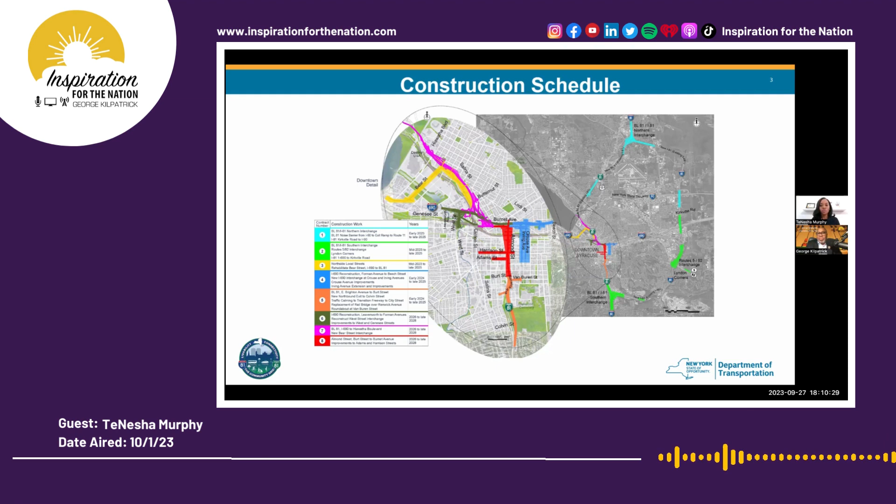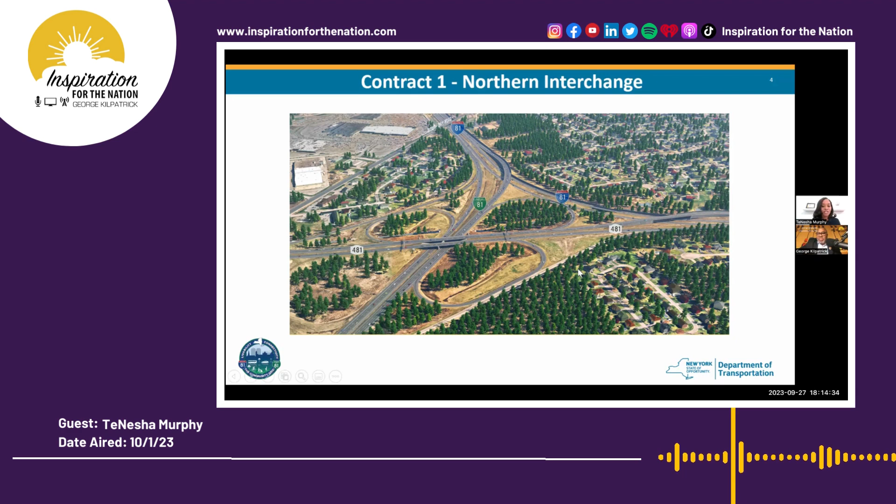All right, so this is contract one. The next section is just some information about contract one. It was awarded in January - it's a $300 million contract. In the spring and summer we did preparatory work: took down some trees, took down noise barriers, widened lanes, started building large culverts. This fall and winter we're going to start the foundations for the new noise walls we're putting up, and start working on the interchange bridges and culvert construction. So that's what's happening with contract one.

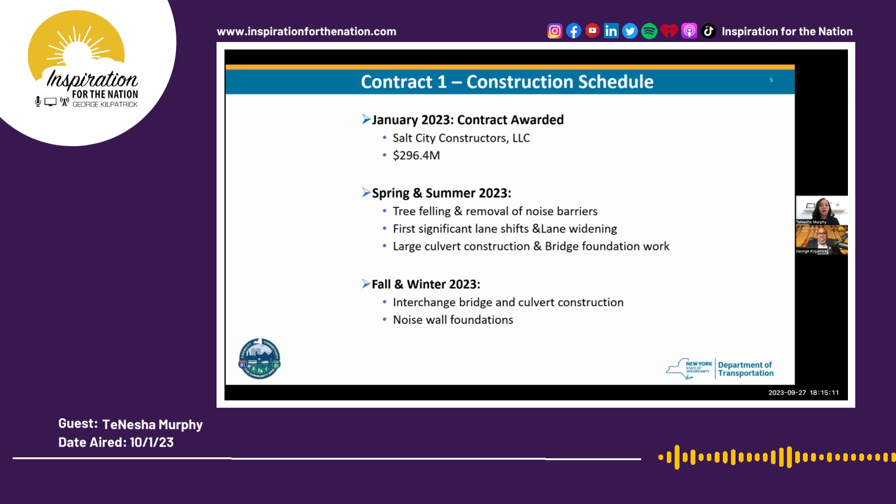Contract one should be completed by the end of 2025. Next up is contract two, which is the southern interchange.

That's where I live, that's where I'm affected. Okay, now we're getting to you. This is where you were coming from. Okay, that's where I was coming from. Exactly, coming down.

So this is our design that we designed for Contract 2. Now, the big thing with contracts 1 and 2 is they are called design build contracts. So what that means is the DOT designs it up to a point, and then we turn it over to the contractor that wins the bid, and say, this is what we want it to look like, this is what we think it should look like, and you design the rest. So those are called design build contracts, for contracts 1 and 2.

When we get to contract 3, I'll explain what that is. So these contracts we build up to a point, and then we let the contractor build the rest. So this was our proposed design for the contractor when we gave it to them.

As you can see, where my mouse is right here is the new 81 coming south, and this is the new 81 going north. You have Brighton Towers over here, you're familiar. So this looks really good, you see everything.

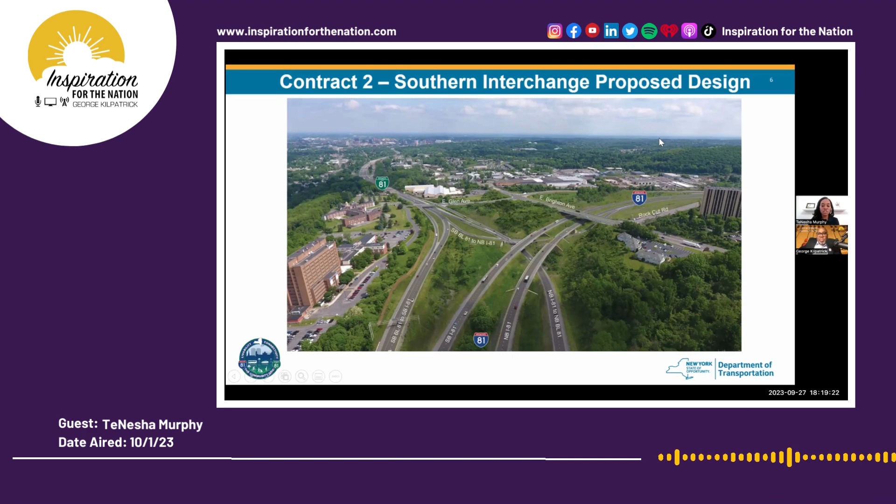So this contract is already started. It just recently started this summer. It was awarded to our contractor CNY Alliance, which is a conglomerate of four different contractors.

It's nearly $385 million. This summer, they did some geotechnical work and started working on the traffic pattern changes. There's also work in this contract in the town of DeWitt and in the town of East Syracuse, and I'll get to that in some future slides.

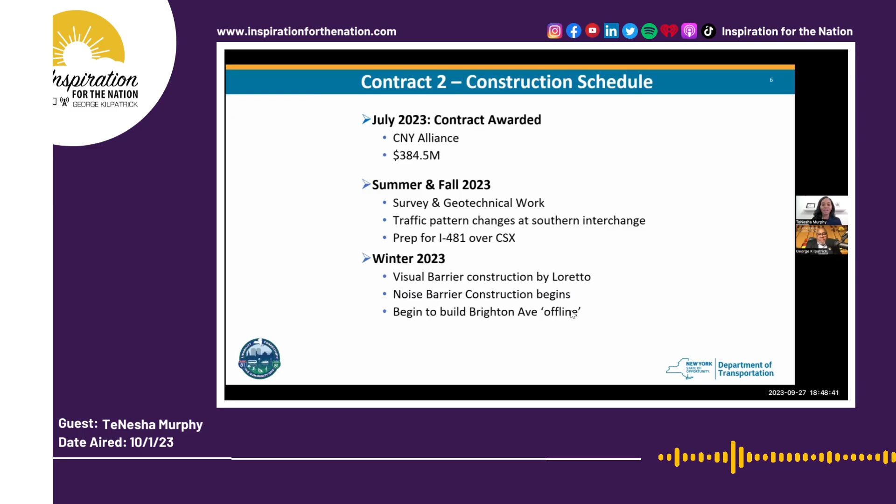This winter, they're going to be putting up a visual barrier for Loretto. They're going to start the noise barrier construction, since a few noise barriers will go up on this contract, and they're going to begin building Brighton Ave, since there's a new bridge being built for Brighton Ave. So George, what is going on now with contract 2?

The biggest impact are the ramp closures. We have two ramp closures happening right now. If you're traveling I-481 southbound to 81 southbound, that ramp is closed, and they detour you — it's a short detour through the city where you take I-81 north to exit 17, the South Salina Street/Brighton Avenue exit, and jump right back on I-81 southbound.

We also have another ramp closure if you're coming from I-81 south going to I-481 north. That detour has you getting off at State Street, hopping on East Brighton Ave, and then hopping on Rock Cut Road to get back onto I-481 north. Those two ramps are going to be closed for basically the duration of the contract, which ends in spring/summer of 2025 — they will not be opening back up.

That's a minute. Yeah, that's a minute. As you can see for the YouTubers here, those two ramps are dead smack in the middle of the interchange, so the contractor had to shut them down to be able to work on switching out the interchange.

If you travel that every day like I do, you can see that they're mowing down the hill — big grass, the berm. They have to take the berm down. Yes, very berm, good, thank you. I called it the big hill grass, but you can see it's like first it was a lot of grass, and now every day we go through there, it's getting lower and lower.

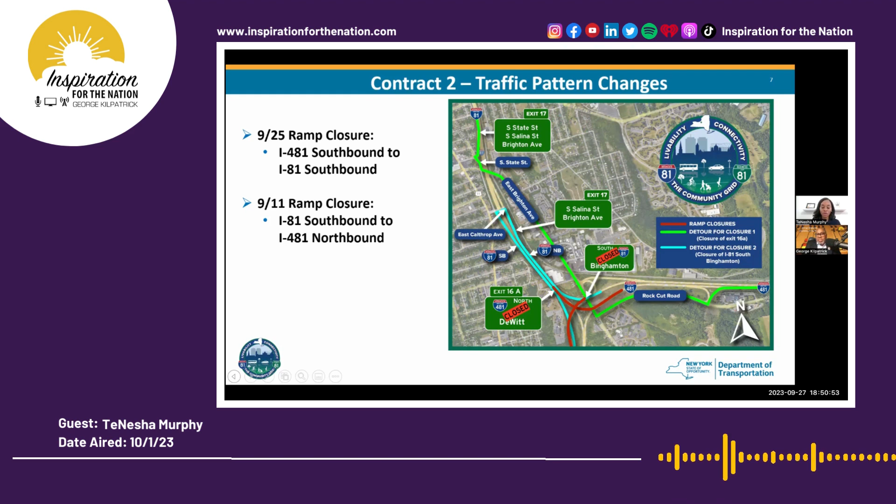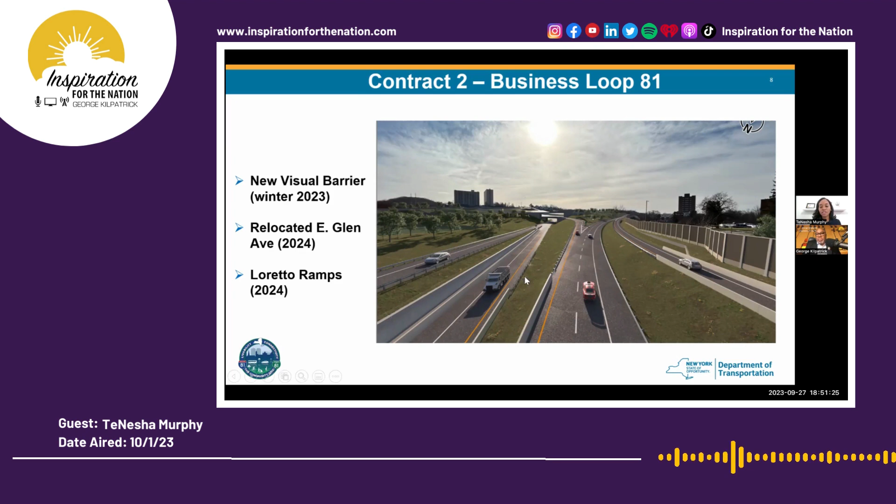Moving on a bit — there's going to be a visual barrier in the future for Loretto that will protect that business from the new business loop there. If you're watching on YouTube, you can see the visual barrier off to the right-hand side of the screen. In this area there are new ramps that will lead you to East Glen, and this is a rendering of the business loop there. Then over in DeWitt, exit 3 by the DeWitt Wegmans, there's going to be some work done under contract two.

Basically what's going to happen is they're going to change this off ramp, which currently only lets you make a left onto East Genesee Street to get up to Erie Boulevard, the former Shoppingtown Mall area. They're going to make that ramp so you can go left or right, putting a light right here so traffic can be stopped to allow it.

This traffic light is going to help people coming from the north. If you're headed north on 481, which will eventually be 81, and you want to get off to go to DeWitt, you're kind of waiting, playing like double dutch trying to figure out when you can get in. So this light will cause a little pause in traffic so that people on this exit can turn safely onto 5 and 92 here.

If you want more information about that, there's lots of renderings on our website you can go and find. But that's a huge change for this area.

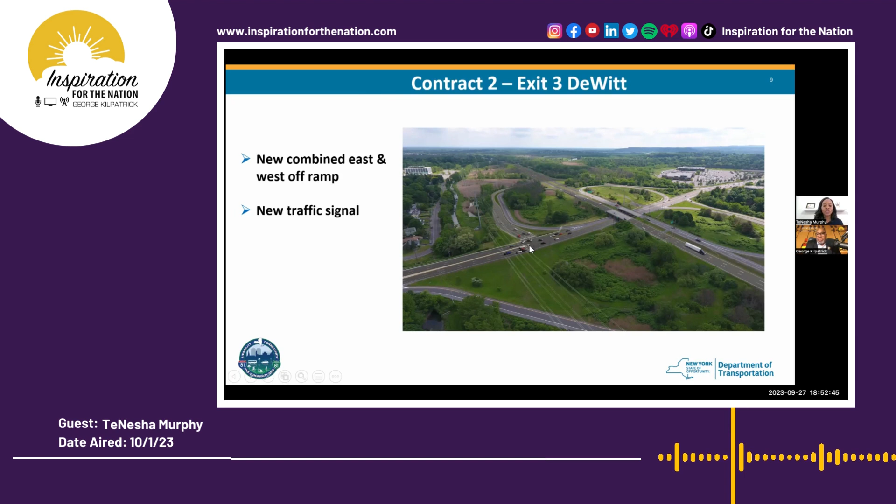This contract has not been awarded, we have not started on it yet. It is going to be awarded probably by the end of this year, and then the contractor will start working in this area in the spring of 2024, so spring of next year.

So, TeNesha, if the lawsuits—so there's a lot of 'if.' Say there was no lawsuit. Yes, let's start with that idea. When would the whole thing be done?

The whole thing will be done by the end of 2028. So 5 years from now, all things considered—court battles and all. Right, if there were no lawsuits, yes, the plan was to be finished by the end of 2028.

Which means—this is what I think some people don't realize—right now we should have really been almost all 5 contracts going at once. But we're only, by the spring of next year, going to have 3 areas within the county that are under construction: the Inner Harbor area, the Southern Interchange, and the Northern Interchange.

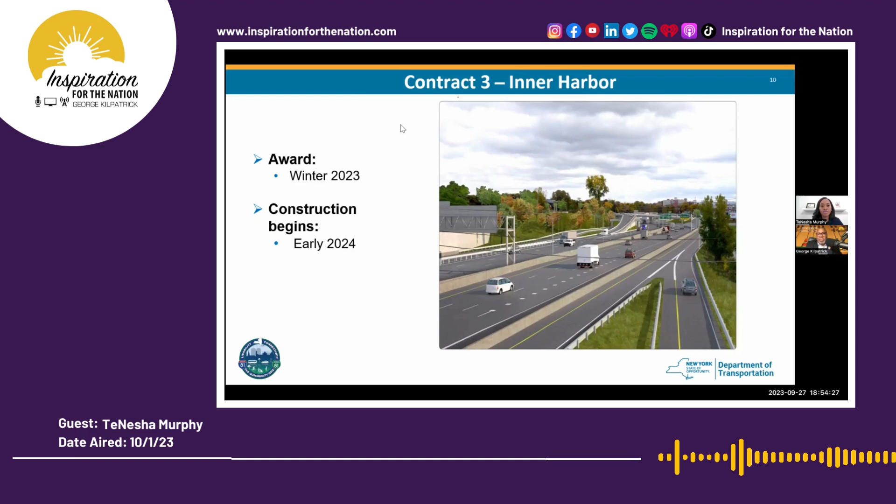The other 2 contracts I'll just go over really quick, really briefly, are contract 4 and 5, and they round out phase 1 of the project. Contract 4 is where we're going to add entrance and off ramps from 690 onto Irving Avenue and South Crouse Avenue.

These are just, when we talk about that grid aspect, there's going to be other entry points instead of everybody—right now everybody, if you want to go downtown, you have to get off on Harrison and Adams. In the future, you can either take the business loop to go downtown, stay on 690 or jump on 690 and get off at Irving and go up to the hill, or if you're coming from the east, get off on Crouse and go up to the hill. So there's other ways to get to and through downtown than just Adams and Harrison.

And I think the other thing, TeNesha, is—because 690 is not going to be affected, unless, well, it is going to be affected because you're constructing a new on and off ramp over there. But generally speaking, that piece of 690, no part of it is coming down.

We are reworking parts of 690 in phase 2, which are contracts 6, 7, and 8, because we have to shift it a little bit in some places. But it's not—690 is just going to be reworked, reconstructed basically. It's not coming down at all, no.

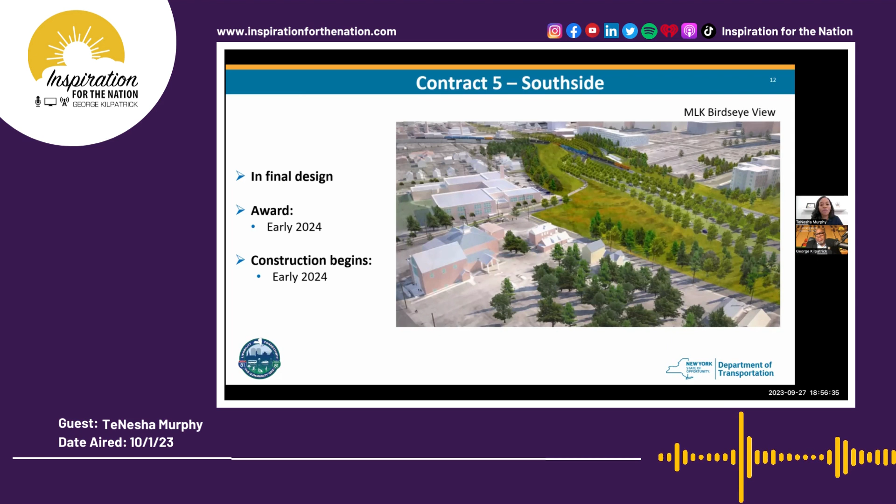Last but not least is our South Side contract, which is really starting from Colvin Street, where we're building a new off-ramp from the business loop. If you're headed from the south side of Syracuse on the business loop headed north, there's going to be an off-ramp at Colvin—that's not there today. This contract runs all the way up to Van Buren, where there will be that new roundabout that was once planned at Martin Luther King, which the community did not want there. So NYS moved it to this location at the bottom of the hill on Van Buren.

You should mention there are a couple of community outreach centers, right? Yes, one at the Hills building, that's Monday, Wednesday, Friday, I believe, and that's from—

We meet with elected officials, stakeholders, and community groups. If you're a community group and you'd like a presentation, contact me. We're happy to come out and update anyone on the project, because you all are credible messengers. So when we give interviews or talk to community groups, we know the information is getting put out accurately, and we're also collecting feedback from people.

If you want to reach us in person, you can come to any of our outreach centers. We have two: one at Tucker Missionary Baptist Church off Oakwood, and the second one is the Hills building downtown, right off Montgomery. They have alternating hours. The Hills building is open Monday, Wednesday, Friday, 10 to 4, and the Tucker Outreach Center is open Tuesdays and Thursdays from 2 to 6 p.m.